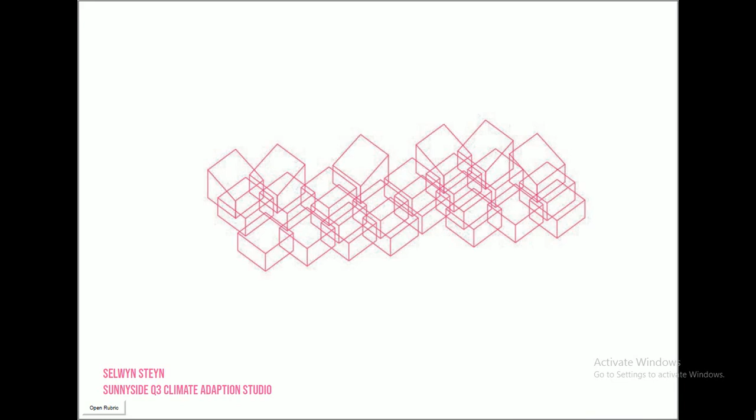Sunnyside Q3 guides an investigation into climatically responsive dwellings in Sunnyside in the year 2030.

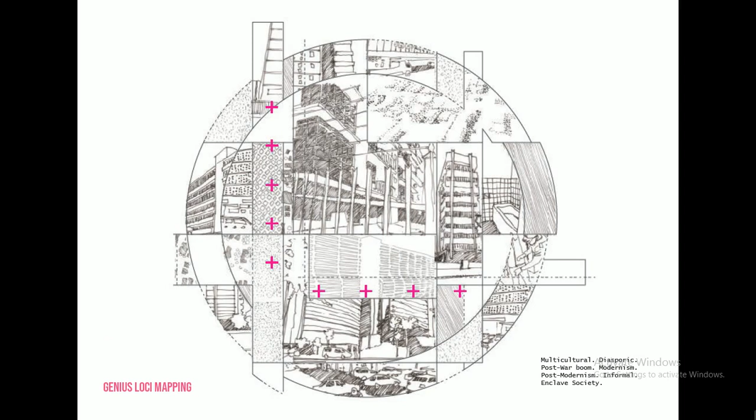I started off by conducting genius loci mapping, looking at the multicultural and diasporic nature of Sunnyside as well as its 20th century built spatial legacies.

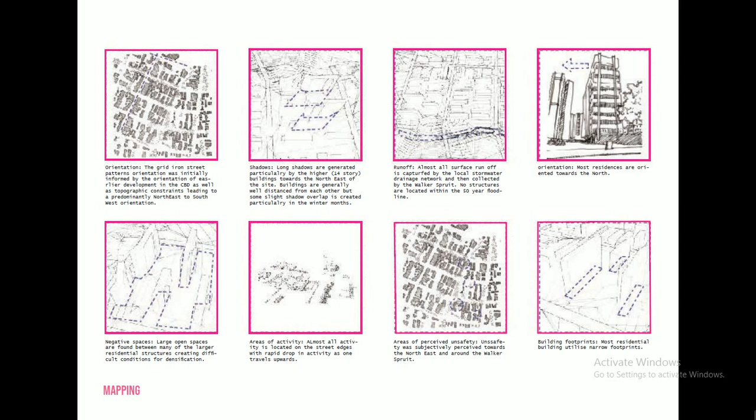Thereafter, I conducted a mapping exercise looking at the orientation of buildings, shadows cast by buildings, surface runoff, negative spaces in and around buildings, areas of perceived unsafety, and so forth.

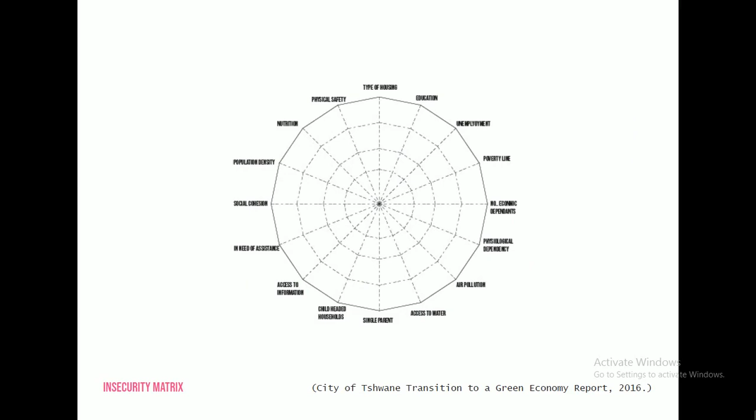Thereafter, I devised this insecurity matrix based on metric points devised by the city of Tshwane in its transition to a green economy report of 2016.

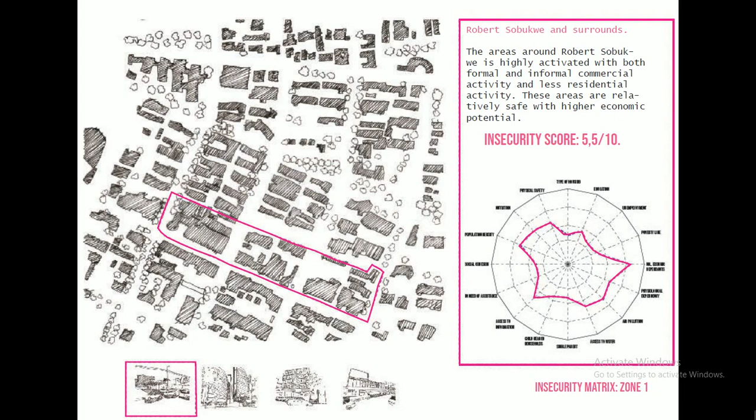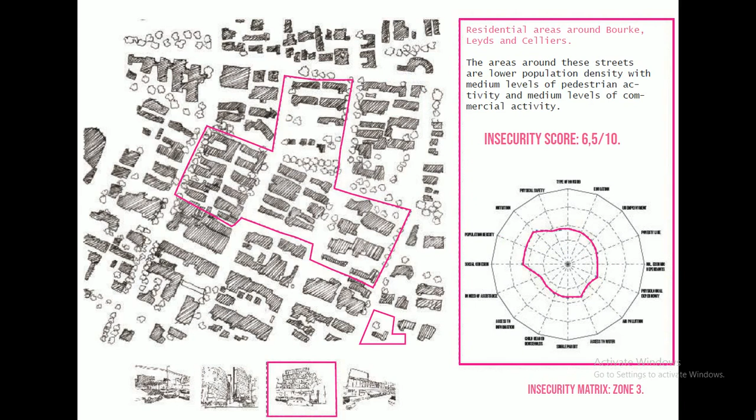Thereafter, I generated insecurity scores for 4 different regions on site: firstly, the areas around Robert Sobukwe, then the areas around Spruitzich Park, then the residential areas around Bourke, Leyds and Celliers, of which my site towards the southwest was part, and finally the area around Sunny Park Mall.

Thereafter, I aggregated these scores, giving the larger Sunnyside area an insecurity score of 6 out of 10.

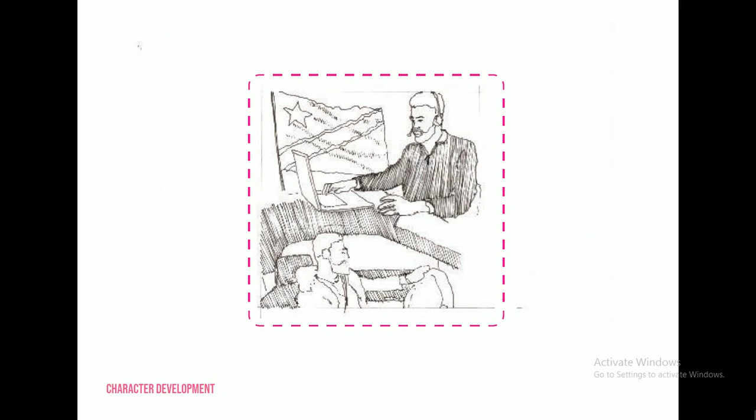Thereafter, I developed a character. My character is an itinerant worker from Central Africa who works from home as a call center operator.

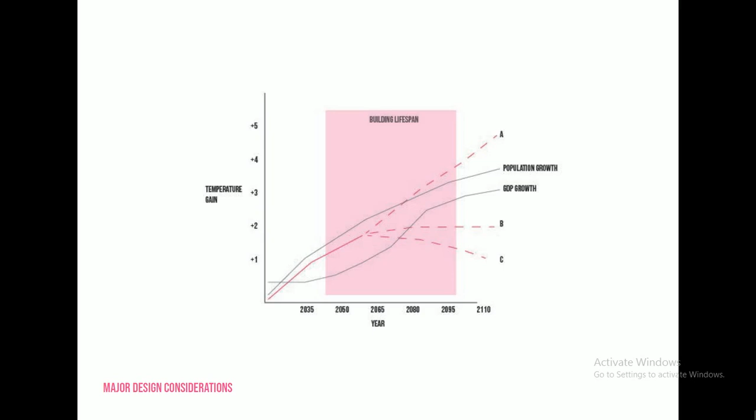Thereafter, I looked at major design considerations, looking at when major climatic changes will be fully manifested, which is around the year 2030, as well as different scenarios in terms of how the climate might change, the lifespan of buildings, population growth, and GDP growth. So I decided to situate my project in the year 2030.

Thereafter, I decided to make material selections looking at the criterion of affordability, climatic performance, as well as sustainability, and I decided on the use of cross-laminated timber technology.

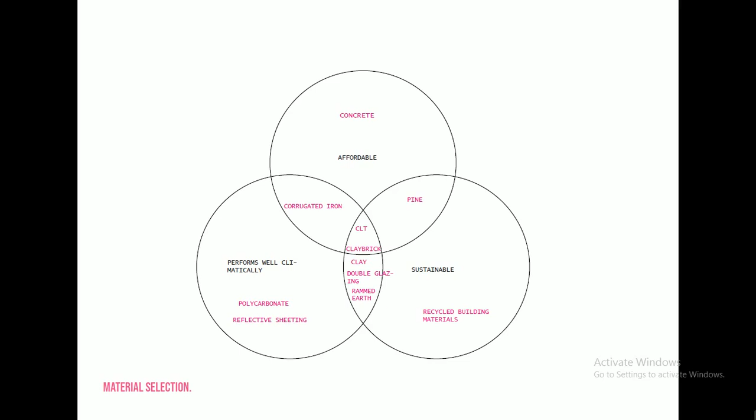I then conducted a precedent study looking at university dorms in Melbourne, Australia by Jackson, Clements and Burrows, particularly because they made use of cross-laminated timber technology, the fact that Australia is climatically quite similar to South Africa, as well as the way in which they generated very free plans using cross-laminated timber technology.

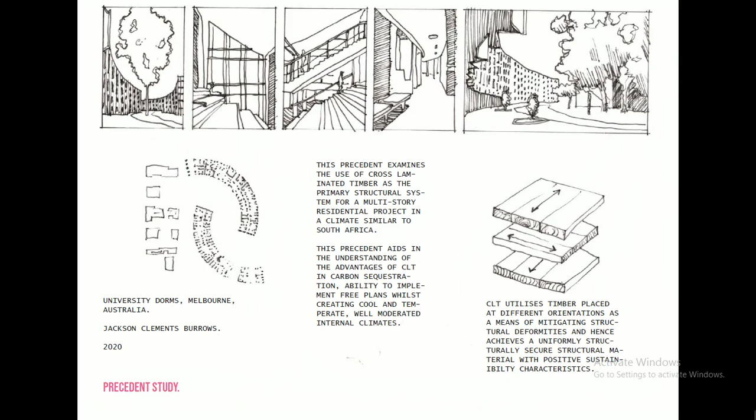Thereafter, I devised a concept statement which deals with the idea of using technology and synthesizing that with climatic needs to create comfortable and aesthetic dwellings.

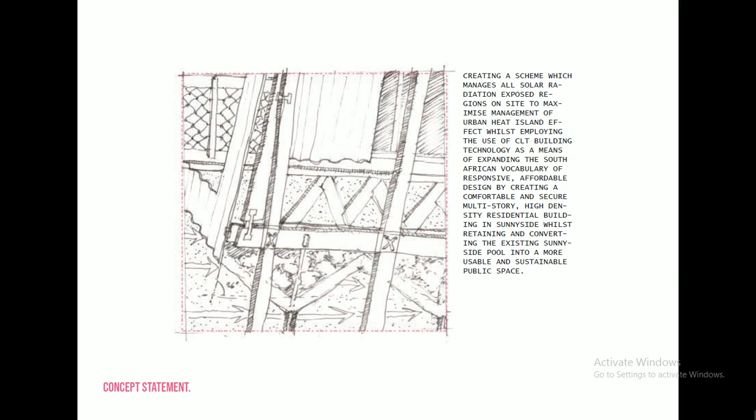So I looked at the area around the pool which needs to be avoided. Thereafter, I looked at the trees on site and decided which of the trees need to be preserved. Thereafter, I looked at the necessary clearance from the road according to SANS standards.

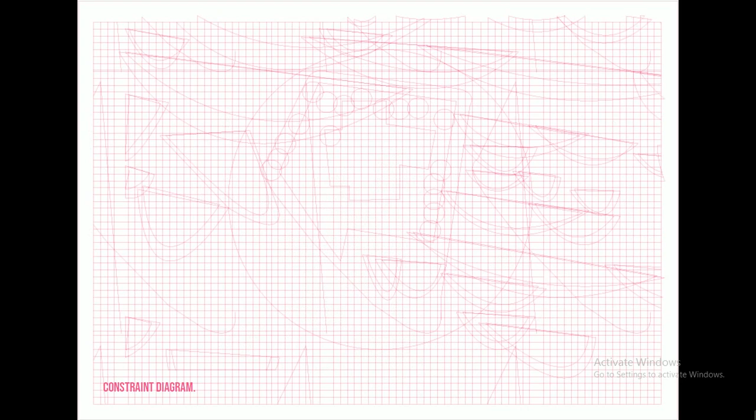I then imposed a 5x5 structural grid placed in relation to the cardinal points. Thereafter, I looked at summer and winter shadow lines created by the surrounding buildings and how this would interact with the site, and from that I then generated this constraint diagram.

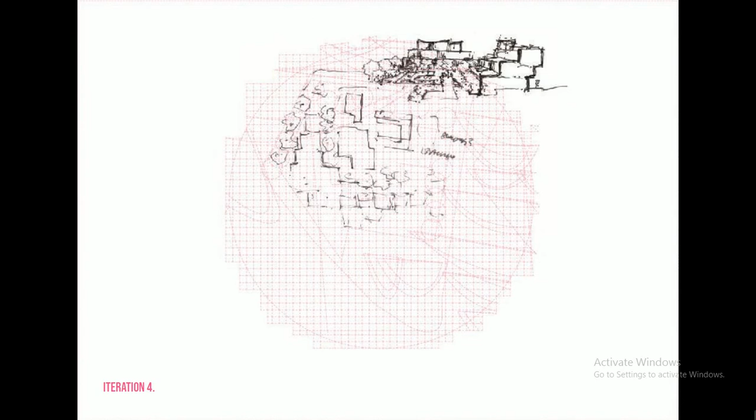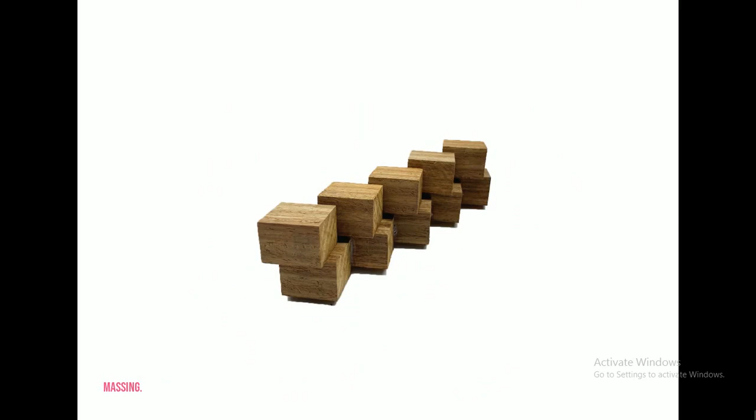Using this constraint diagram, I then created very quick iterations of what can possibly be achieved on site. I then did the same thing in built form using models to explore different potentialities on site. Thereafter, I did some quick sketches of what the scheme could look like, as well as massing explorations.

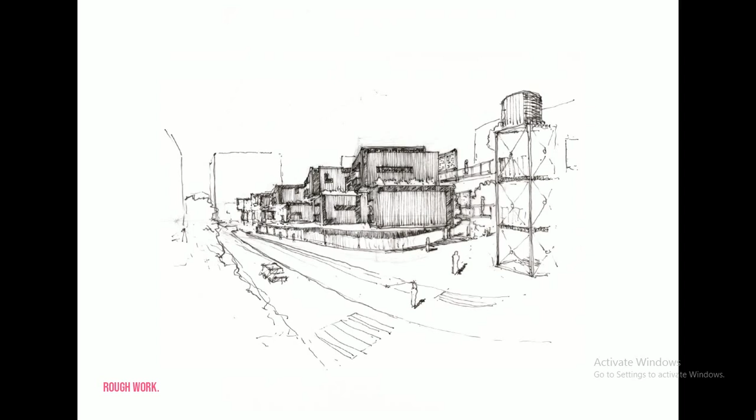Thereafter, I moved into my final presentation. So in terms of how my form was generated, I took a single dwelling.

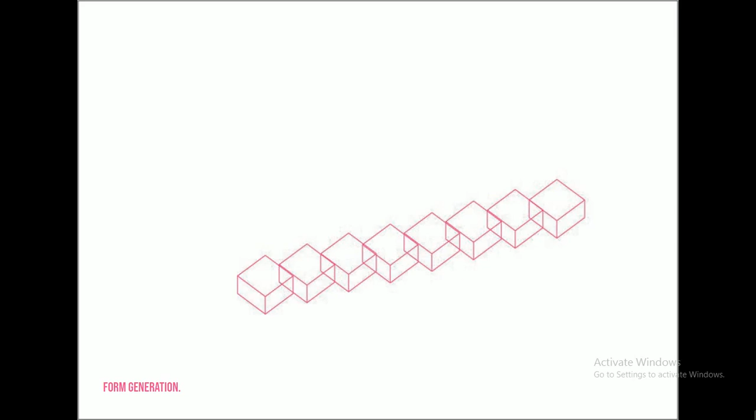I then placed 8 dwellings next to each other. I then offset them from each other to create a bit of privacy, which also allows each dwelling to have 4 facades instead of 2.

Thereafter, I scaled up the scheme to 4 stories. I feel like this is an appropriate density for Sunnyside, and this is based on the density of surrounding buildings.

Thereafter, I offset all the dwellings towards the east to create overhangs, which then protects glazing from direct sunlight. Thereafter, I offset the rows of dwellings towards the northwest. Thereafter, I removed some of the dwellings, which allows for air to filter through the scheme.

Thereafter, I slanted the roofs of the dwellings found at the top so that water can run off successfully, and I then changed the orientation of some of the dwellings. In terms of the major design components of the scheme,

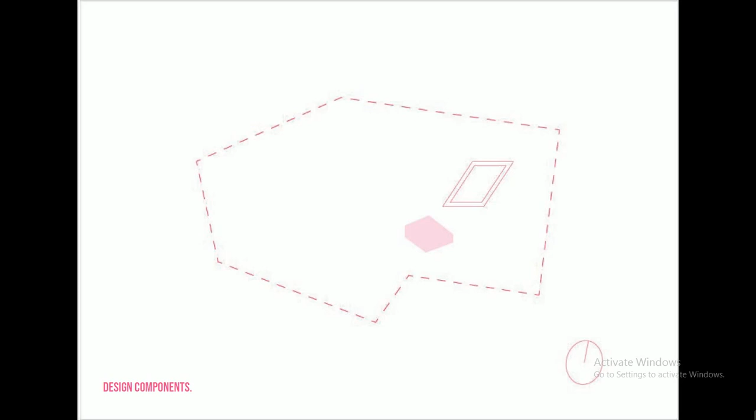I'm keeping the existing pool as well as the pool office, pool maintenance yard, and so forth.

Thereafter, I am suggesting that Pretoria develops a bicycle highway throughout the whole city, which then incentivizes users to make use of bicycles, which is a much cleaner form of transport than buses, taxis, or motor cars.

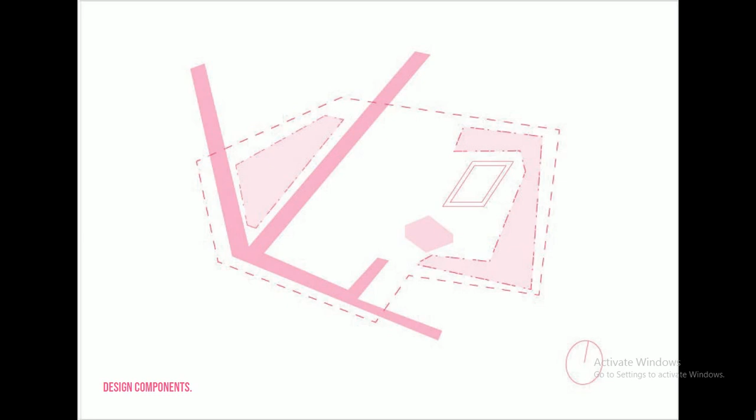Thereafter, I selected areas on site which are to be covered using foliage and greenery so as to minimize urban heat island effect.

Thereafter, I suggest that a commercial zone is placed on the ground floor with a terraced garden towards the east. Two towers for vertical circulation, in the form of a staircase and elevator shaft, are then placed on site.

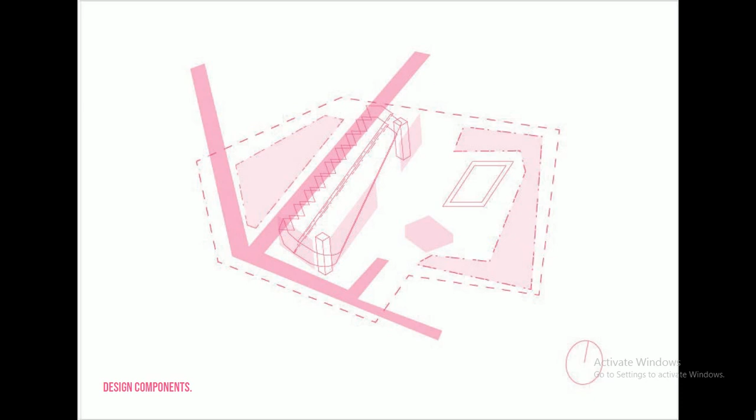A screen is placed towards the east and south to generate privacy between pool goers and people living in the dwellings, as well as blocking harsh morning sun.

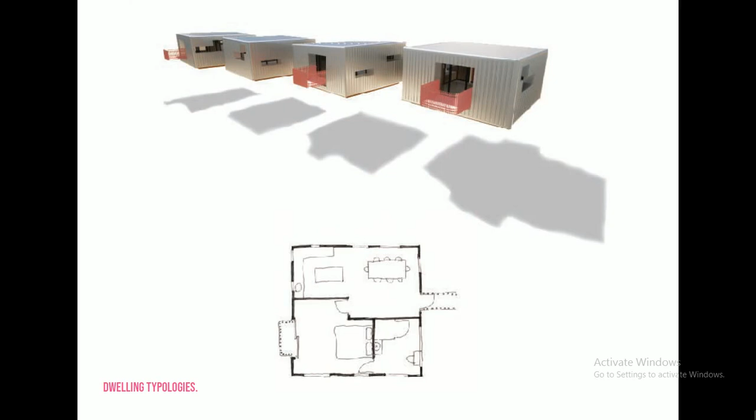Thereafter, passages are added for circulation, and then the dwellings are added. I generated 4 different dwelling typologies. Some of them are single room, some are double room, all fitting into the larger 8.5 by 8.5 module, generating dwellings that are roughly 70 square meters big.

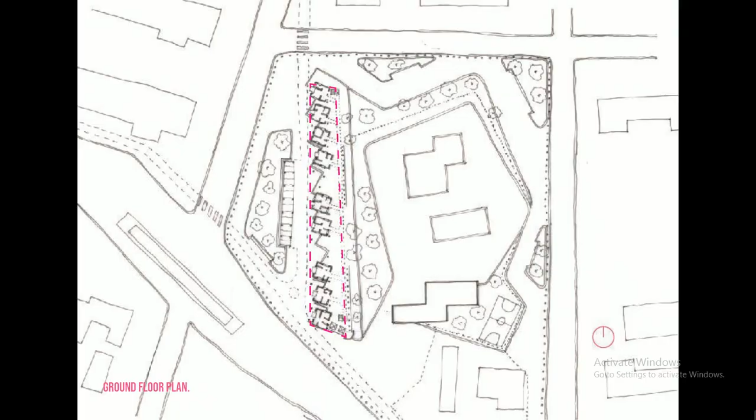This is then the existing pool, and the contained area of the pool is made smaller so as to create a more generous public offering to the surrounding pedestrians. This is then where the commercial zone is located on the ground floor, as well as dwellings on the first, second, and third floors.

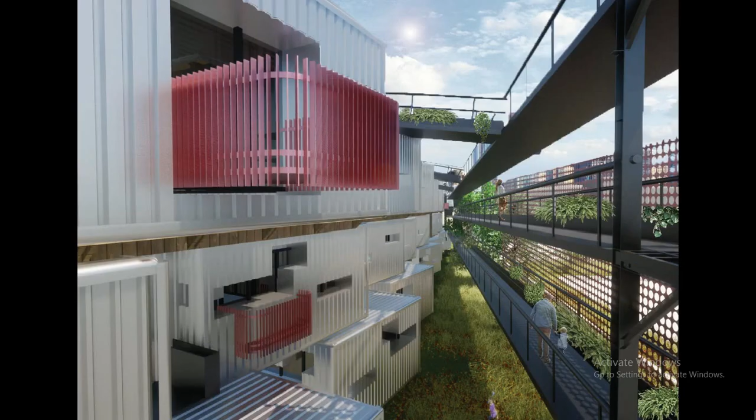Planter boxes are placed along all horizontal circulation. The reason for the planter boxes is it provides a way of concealing services, since it will be quite difficult to place service ducts within the dwelling, so the services are rather placed within the horizontal circulation.

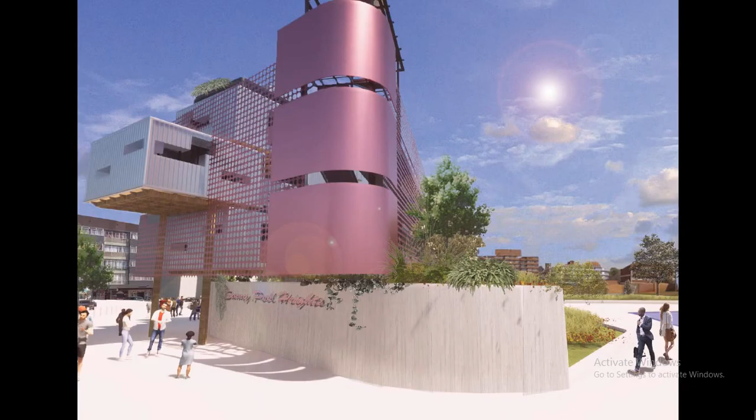The form of the staircase takes inspiration from the concrete staircases of some of the surrounding buildings. Similarly, the typeface used for the dwelling takes inspiration from some of the 70s type seen in surrounding structures.

The screen wraps around one of the dwellings towards the southern edge, creating a perceived cantilever for a bit of architectural interest. A dynamic edge is created, leading users in towards the public pool.

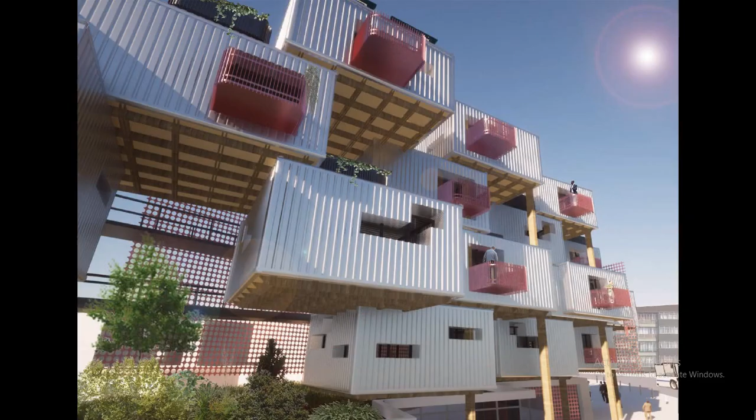As you can see, overhangs are created towards the west, which also aims at blocking sunlight onto the structures. Small gardens are placed sporadically between buildings.

All dwellings are covered in or clad in inverted box rib. This is done because it's a light material which reflects sunlight, although the material will be powder coated so it does not create glare for those living around this scheme.

Pink is used as an accent color. This is done for the reason that quite a bit of greenery and foliage is present, and pink is a complementary color of green. The entrance to the dwelling is on the ground floor next to the commercial zone.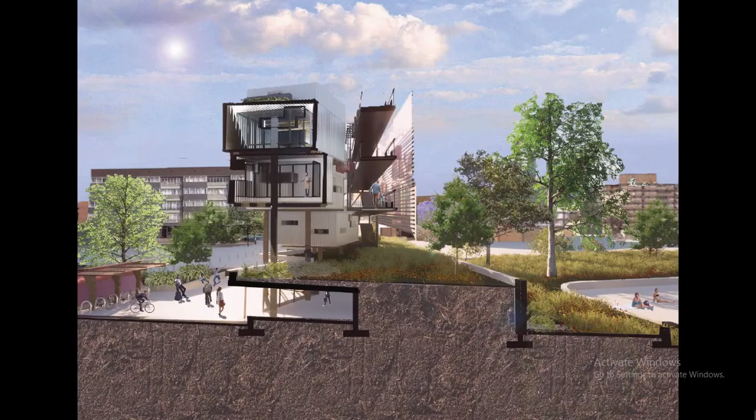On this section you can see that trees on the terraced garden will only be found away from the slab of the commercial zone, since they will need quite a bit of space for their roots. So much smaller foliage like grasses are placed on top of the slab, used as the roof for the commercial zone.

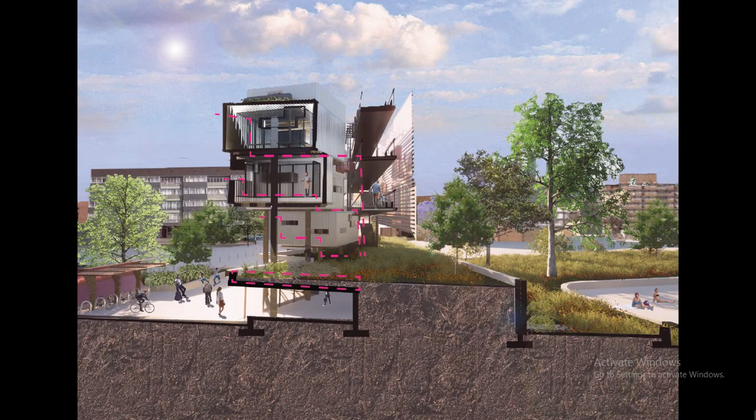Then openings in the floor panels, as well as the fact that the windows are placed high up within the dwellings, allows for cold air from within the cool courtyard space to move into the dwellings and out at the top, creating constant movement of cool air.

The spaces between the dwellings also allow for sufficient cross ventilation. Here you can see towards the east, the screen blocks glare and harsh sunlight, and towards the west, the overhang is used to protect all glazing.

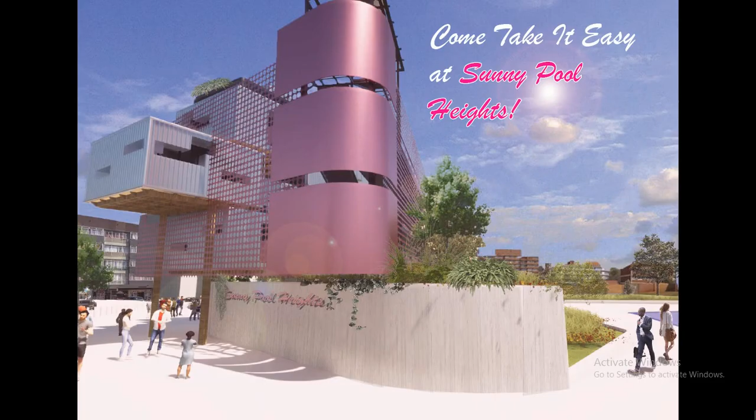Come take it easy at Sunny Pool Heights.